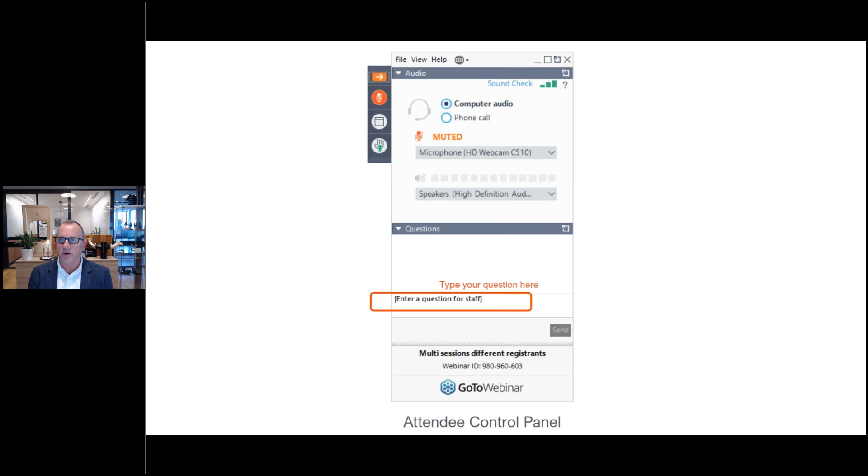Next slide, please. So just a minute on Stratasys. Stratasys is one of the pioneers in the additive manufacturing industry. We have more than 140,000 installations around the globe, and more than 30 awards in the AM industry. Today, we are the world's most widely used 3D print brand, especially in manufacturing and for tool making. Next slide, please.

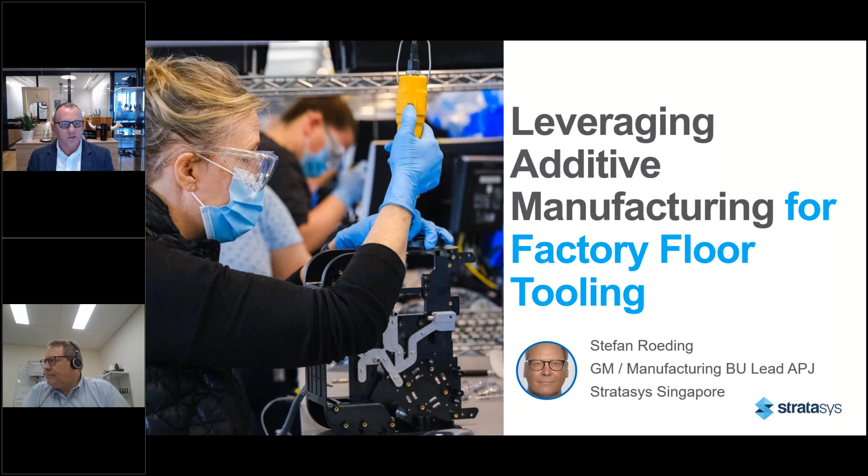Before I turn over to Stefan, if you could turn on your camera - let me share some highlights of Stefan's background. Stefan has been in additive manufacturing for many years, well over 20 years. He's also an award-winning additive manufacturing professional, and he won a best practice award from Ford for quality inspection fixtures. He now serves as the regional general manager for our manufacturing business unit here in our region, plus he's the general manager for Additive Flight Solutions, a joint venture between Stratasys and Singapore Airlines, where on a daily basis Stefan and his team produce end-use parts and lots of tools for manufacturing floors around the globe.

So, Stefan, welcome to our webinar, and thank you for agreeing to come in and speak to us today around factory floor tooling. Great, thanks, Ben. I think I have nothing to add to this introduction. Thanks a lot, let's go straight into the topic. As Ben mentioned, please raise a question, and if it fits, we will try to put it inside the slide.

So let's go straight to manufacturing trends. I think we see today a few very important elements worth mentioning here. Number one is, of course, we are moving forwards to Industry 4.0. We try to go from a physical to a more digital inventory trend. Even though in a lot of SMEs this is not happening so quickly, we see growth in the request towards this technology - large multinational companies are moving more towards digital inventory rather than spending a lot of money keeping parts on stock.

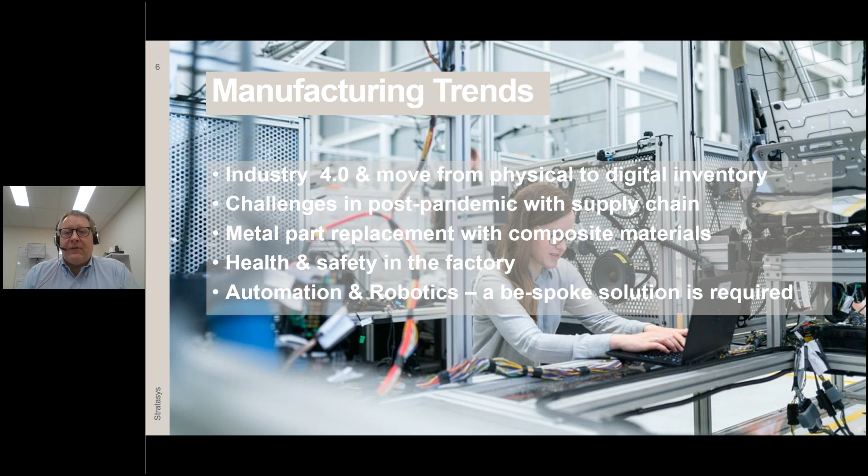And of course, automation and robotics. Here in particular, we see a huge potential, and I think we show a couple of examples. Weight reduction on end of arm tooling means half the weight, means increased speed. Increased speed means faster cycle times. Faster cycle times is bringing more profit to the companies.

Okay, let's talk 5 minutes about Stratasys. Stratasys is today the company which can offer the widest portfolio of 3D printing technologies. You have maybe seen the recent announcement, we took over 2 additional companies. By today, we can offer PolyJet, which is famous—I think everyone knows them in regards to full color printing.

Recently, there were some tests with the Fraunhofer Institute in Europe, really printing eyeballs so realistic that you can't see the difference anymore. We recently added RPS, a company which produces stereolithography printers. We are focusing with these printers clearly on investment casting and large prototypes with very fine details and high accuracy.

The FDM portfolio is pretty well known. I think Stratasys developed this technology 30 years ago, and today we talk mainly about manufacturing-floor type production machines, not the small engineering machines.

We added lately Origin, which is a DLP technology, very interesting especially when it comes to large scale manufacturing and very fine detailing. DLP technology will also be introduced to aviation. There are materials which fulfill all the requirements of FST, as well as have already been approved by major aviation OEMs.

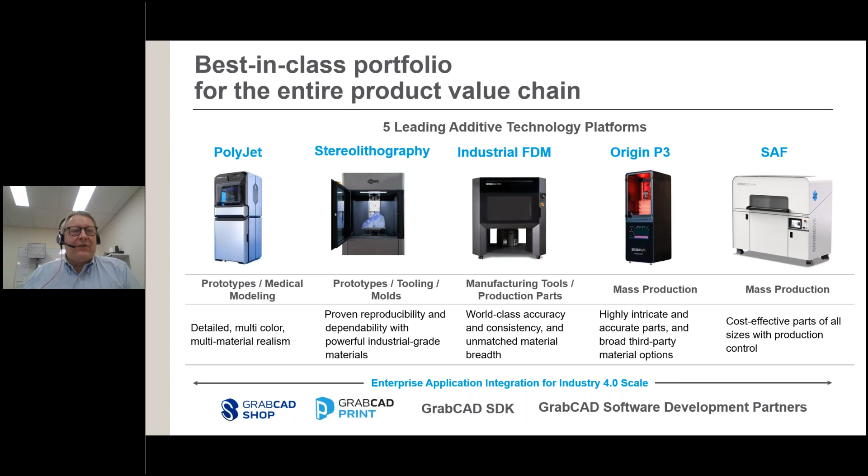Good, let us quickly look at the application technologies. As I mentioned before, we classify jetting, or PolyJet, more on the design phase. It's fast, it's very accurate, and of course very colorful, but this is really more for high definition prototyping. When we move over to the engineering side, we go into FFF filament printers.

Here we find mainly our MakerBots, our entry engineering technology printers. Moving over to manufacturing, of course here the Stratasys are especially the F450, the F900, but also the new F770, which can print up to 1 meter in length, a large volume. These printers make, especially for printing large components, very, very interesting options.

And then the DLP and SAF technologies are clearly aiming for serial production. We are quite happy that we already have customers who are producing, or intend to produce, more than 20,000 parts a year. And for these cases, the SAF technology is the right machine.

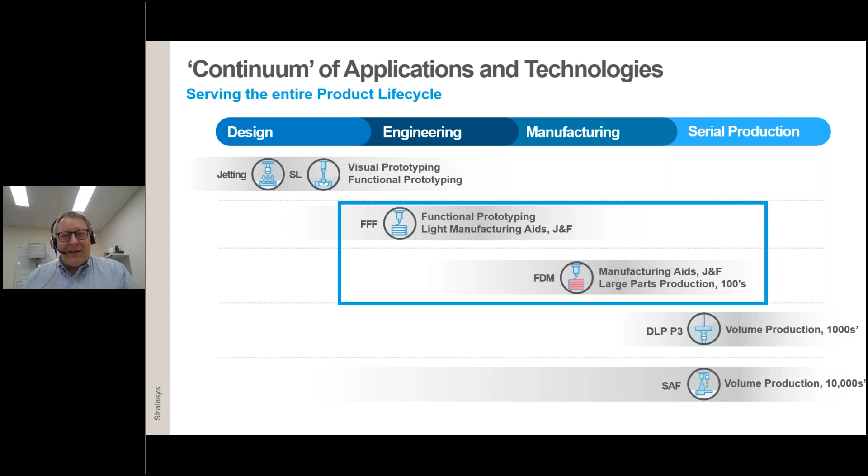All right, let's discuss today mainly about shop floor, and here I would like to concentrate on FDM technology. If you have questions regarding DLP or SAF, the new H350, I believe Ben is more than happy to send over some more information. Why FDM?

It's very straightforward, it's about a few very important points: impact strength and heat resistance. For example, for the nylon 12 carbon fiber, which we are using on the 450 and 900s, this is fantastic if you compare it to, for example, SLA, which is far too brittle. We have with the nylon 12 carbon fiber the best mechanical properties, which is more than 25% stronger and 100% greater stiffness compared, for example, to SLS.

It's easy to use. Whenever you see a company producing a powder bed machine, you have special environments, you have powder spill all over the place. This requires much more attention to the setting. An FDM machine you can put into the corner, plug in the power and internet connection, and then off you go.

Return of investment - this is typically for our printers between 9 to 18 months based on the machine type. For example, we have here in Singapore also an F900. Investment, of course, is huge, we have to print a lot of parts, so here we are aiming for around about below 24 months return of investment.

Our printers are also producing certified parts - that's what we are doing here in Singapore, with certified material. For example, Ultem 9085, but also Antero 840 CN are approved certified materials for different business segments like aviation, but also rail, public transportation, and of course we have with Ultem 1010 also medical approved material. But what's much more important is you have one printer which can cover multiple applications.

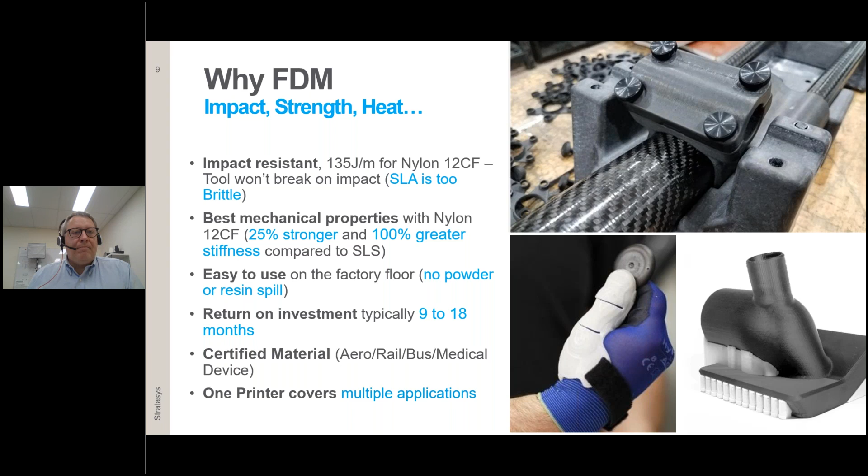A quick one on the nylon carbon fiber again, because this is very often my choice of material when I come to shop floor tooling. We have right now, or by today, the best in-class carbon fiber reinforced thermoplastic. We have a much higher density, over 99%. We have 35% chopped carbon fiber placement. We are achieving over 90% isotropy consistency. And we have with 135 joule per meter, actually a fantastic impact resistance.

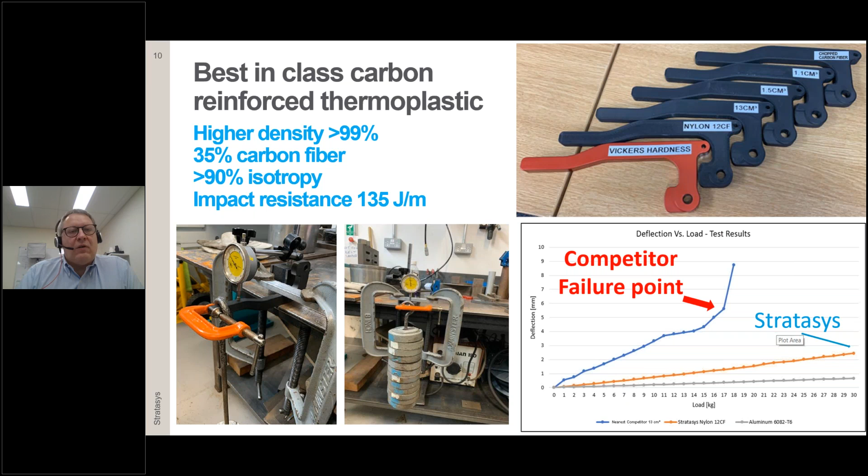The orange line is the Stratasys nylon 12 carbon fiber, and then the gray one is the aluminum 6082 Temper 6, which is a pretty typical tooling aluminum material actually, and the nylon 12 carbon fiber is coming much closer to this application. It is for a logistic company, it's a hook which has to take impacts as well as, of course, pull a lot of weight.

I just want to introduce you quickly to one of the machines, FDM, which is our new F770, which is a shop floor printer. It's mainly focusing on two materials at the moment, ASA as well as ABS. And it is a very price-sensitive printer, very economical, large print format, up to 1 meter by 600 by 600. And a very important message: you can make small parts on a big printer, but you cannot make big parts on a small one.

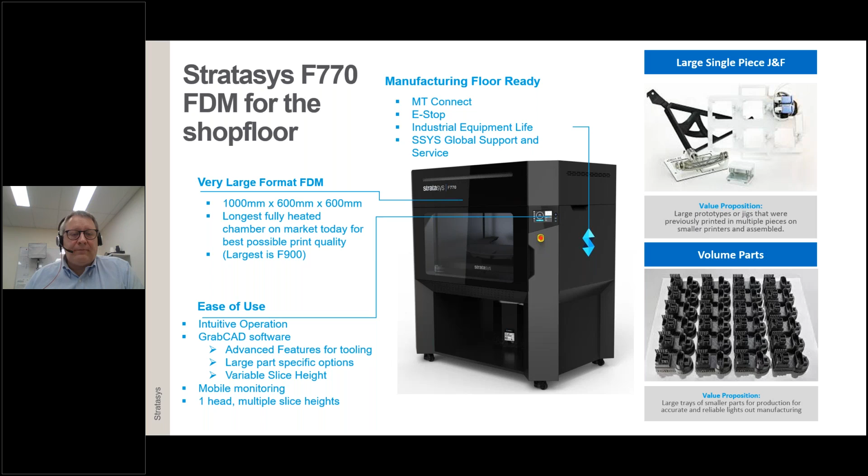So bear this in mind when you think about investing in a smaller printer. The price difference to this large 1 meter printer is not as big as you might think. Bennett, I think, is more than happy to give additional pricing information on that.

Let's go back straight to challenges for the factory floor. I'm concentrating on a few topics: prototyping, spare parts, metal replacement. So the typical challenges today are high cost.

Obviously, a metal produced part. We have done several comparisons, and we see very often that if you machine a prototype out of an epoxy block material or out of aluminum, for example, we achieve sometimes up to 98% cost reduction by just printing the part you need. We have a nice example I'll show you later on.

This can be printed during the coffee break. It's 30 minutes and then the part is available. Try this on a milling machine. Another point is lead time, of course. You print when you require the parts.

We see today also a lot of 3D printers without heated chambers. You have a less consistent bonding between the different layers, and this is, of course, leading to failures in products. So unreliable printers is today also a threat or a challenge.

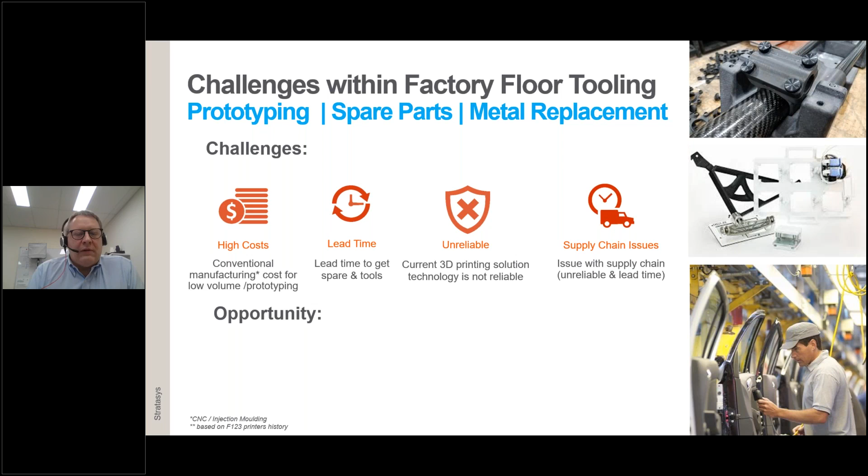And as I mentioned before, supply chain to me is always an extra point, especially since the last 2 years. I don't know how you see it actually, but to me this has been a nightmare at several locations when you're really looking for or waiting for part deliveries from different locations. 3D printing makes it possible to print on demand, and we are changing also here in Singapore more towards local manufacturing. So opportunities with our technologies is great.

Lower cost, we promise, and I think this is really a promise. We can reduce cost on a lot of applications between 60 to 95%. I have enough examples, I will show some later on.

Fast turnaround. Typically, lead time reduction from 50 to 90% is possible because you print on demand, you print on the spot, you print at your site. So you print when you need. Shipping cost saving, obviously, I don't have to mention this. Print in-house, it's available on the spot.

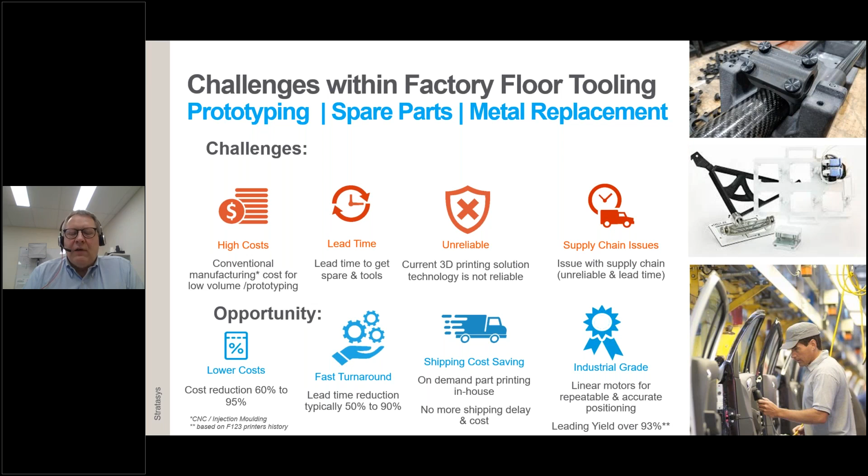And of course, I think one of the very important points, and we see this every year in our customer satisfaction reports, the reliability of our technology with dedicated service engineers at your hand is a very important step towards reliable manufacturing. As you can imagine, we produce aviation parts. I cannot allow a machine breakdown for 1 or 2 days just because a fan is not working. So we need, first of all, the service, but foremost, I need reliable printers.

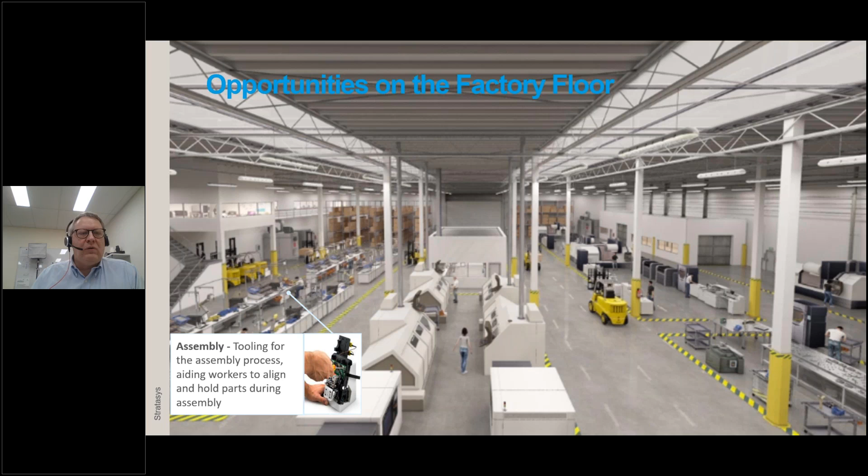Okay, opportunities on the factory floor. Typical factory floor, and we do this really very, very frequently with aviation customers as well as other industry customers. When we are going on a factory walk, we find on average 30 applications where we would like to prove to the customer that, look, print the tool and we promise you we have a cheaper product, less cost, and a more reliable tool.

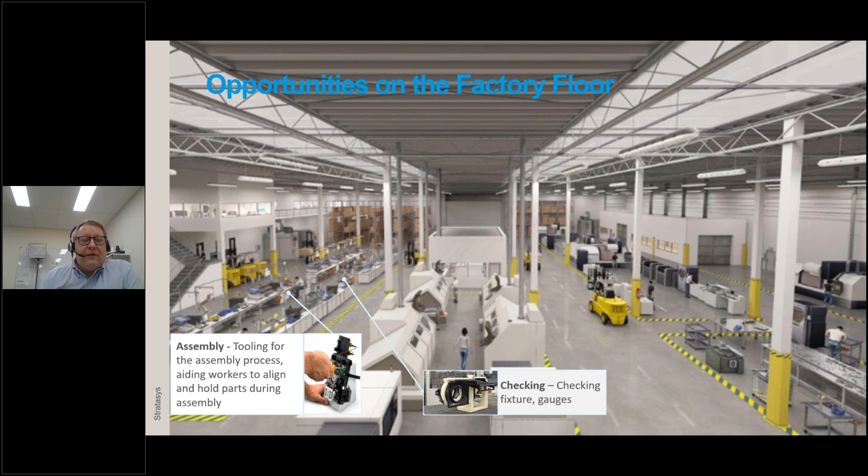Some are, of course, in assembly. We have parts in checking plug gauges. It's a very big topic and something where I spend a lot of time of my business life inside. R&D, tooling, development phases of a product.

Obviously, this is one of the major prototyping steps. That's why 3D printing became so big. Obviously, we all agree that 3D printing replaced most of the conventional manufacturing methods in creating prototypes. We have quality control, jigs and fixtures, also one topic I really like.

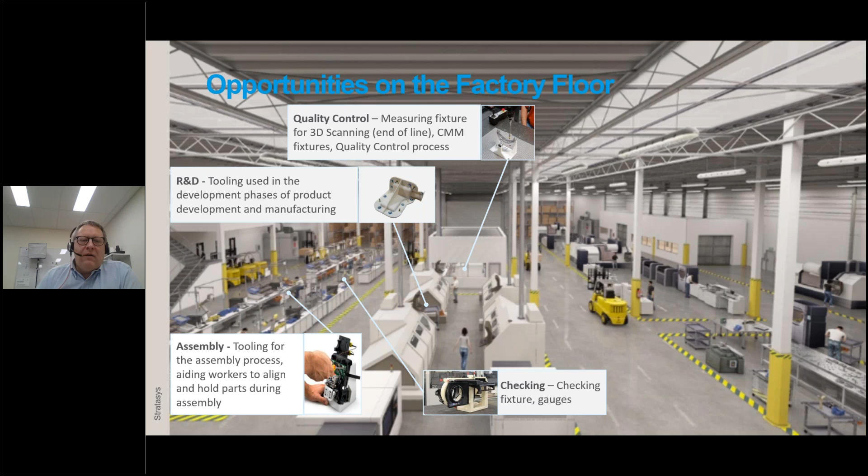A measuring fixture is a one-time use application. It is produced only once, so 3D printing is the choice of manufacturing technology for measuring fixtures. Packaging logistic, fantastic application. What else do we have?

Health and safety. Oh yeah, we have a very nice example. I'm not sure if you can see the picture. This is the employee wearing a supported thumb on his right hand, which is avoiding health issues and, of course, injuries to the employee. It increases greatly safety and addresses ergonomic issues.

And of course, last, automation, end-of-arm tooling, definitely a very interesting topic. As I mentioned before, less weight means faster cycle time. Faster cycle time means more profit.

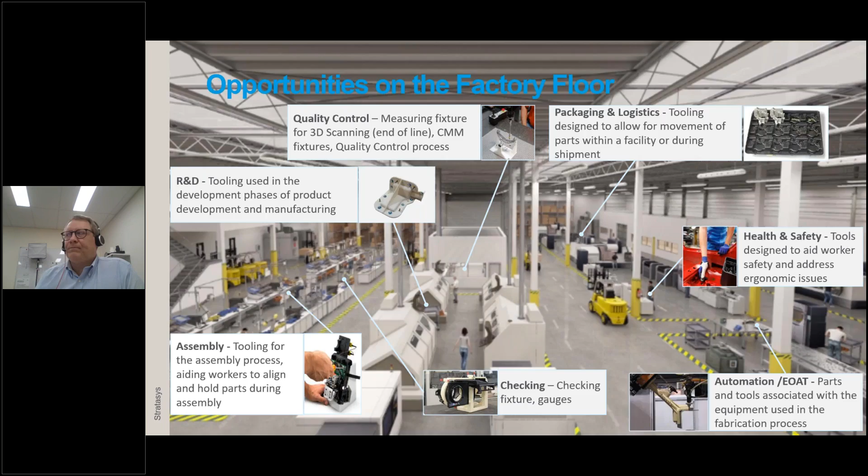The field is so big, I'm concentrating really today on 4 main topics. I'm talking about tooling and end-of-arm tooling. I'm talking about spare parts production, end-use parts. I'm talking about measuring fixtures on assembly jigs. And of course, I show some examples from the CNC sector.

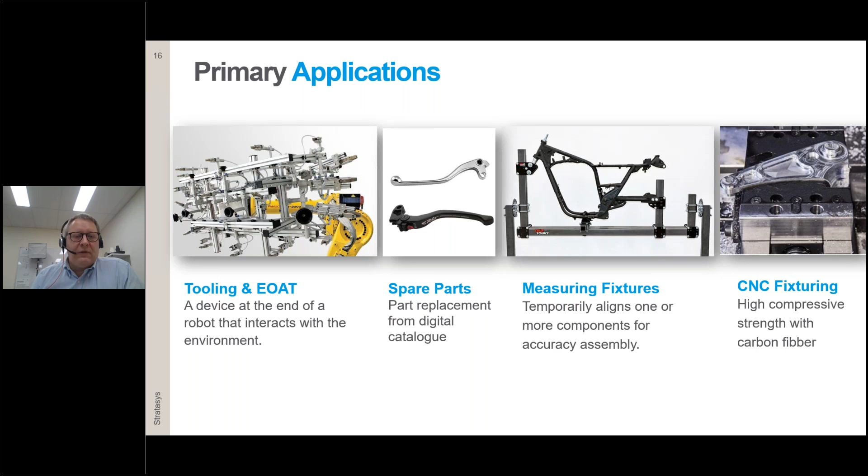Because we produce more and more 5-axis produced components on our CNC milling machine, clamping is a very important and difficult issue here. So let's go to tooling and end-of-arm.

This is a nice example from aviation. It is an aileron hinge bearing tooling. You see the hinge bearing tooling, which normally has a metal bearing inside. And the customer required a tool to remove this bearing from the aluminum part without damaging the aluminum part.

And yeah, 3D printing was able to print a very simple tool, put it around the aluminum aileron part, and hammer out with an additional nylon carbon fiber 12 tool the bearing from the part and replace it with a new one. Fantastic example. It is very lightweighted. It addresses all the important ergonomics. And if I remember correctly, the tool was around 1,200 Australian dollars, and it was delivered within 48 hours. Very straightforward.

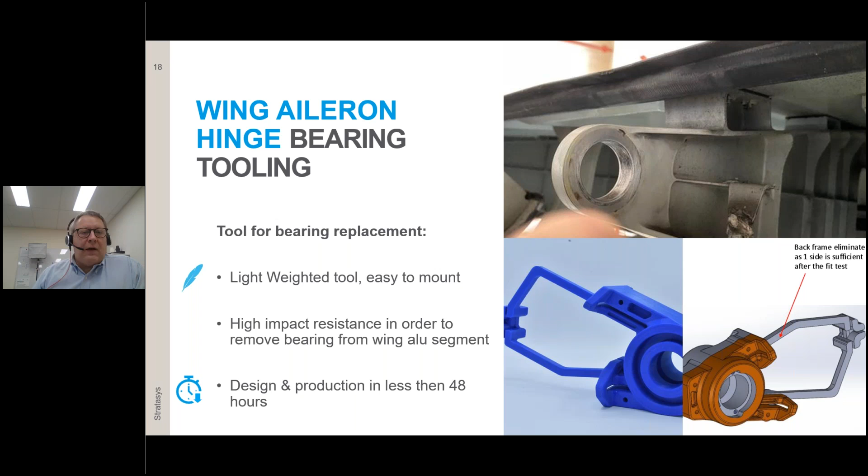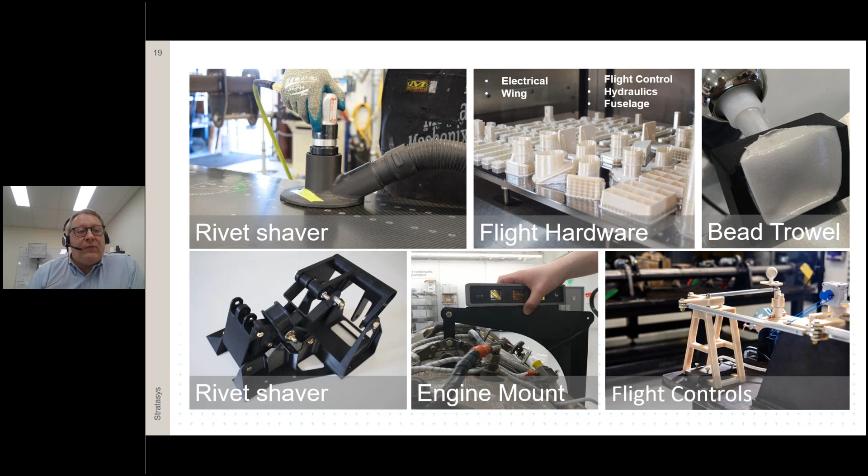Another parts for aviation are, for example, rivet shavers. All these tools have been designed and developed by Boom Supersonic, the nice company trying to get supersonic back into the air. We have engine mountings, flight control parts. So you see not only tools, but also end-use parts. Especially the engine mount and the rivet shaver are production tools permanently in use.

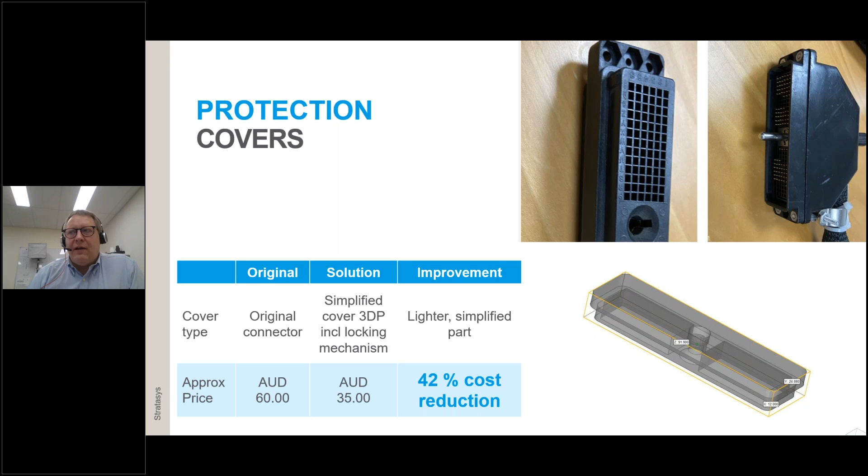Protection covers, a good example. This is one of many parts we find during our shop floor. It's about offering protection covers to special avionic cables and plugs. The original plug is priced at 60 Australian dollars, and a simple replacement tool including locking mechanism costs $35. So you have a 42% cost reduction. To me, this is a no-brainer. It's proof that with design changes and an optimized component approach, we can beat conventional tooling at cost.

Another very important application, of course, are grippers, especially grippers in an environment which requires ABS ESD7 material - electrostatic dissipative materials. We have some more examples from Ricoh later on. It's a fantastic application because grippers can be produced much lighter. You have optimized vacuum or air channels. Very often you combine multi-parts into one single component, which reduces storage, design, and maintenance cost. And of course, printed overnight, so availability is fast. Especially these multi-grippers, weight plays a crucial role. You need to reduce weight in order to run faster cycle times.

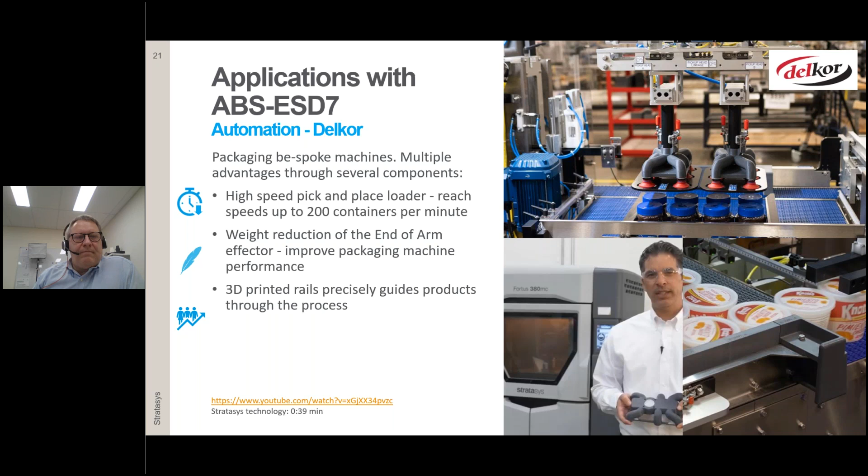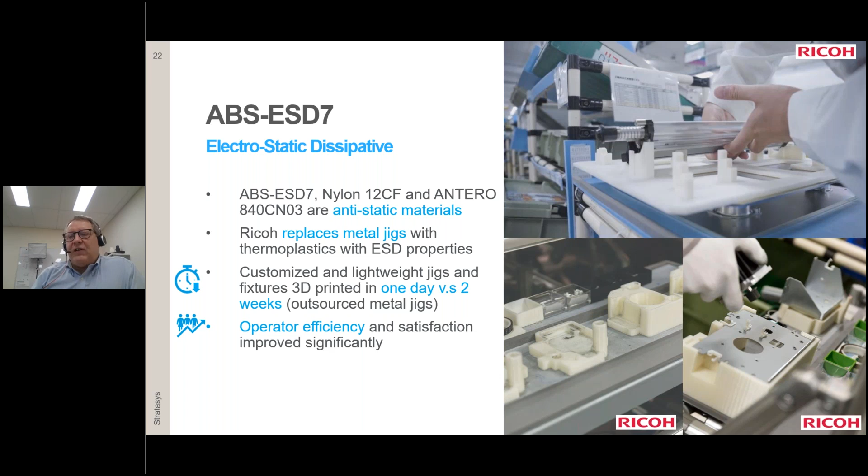Another one, this is from Ricoh as I mentioned before. The anti-static materials play a very important role here, and we completely replaced most of the metal jigs with our thermoplastics. It's lightweighted and printed in a day compared to 2 weeks for the outsourced metal jigs. It's more operator efficient, because we can integrate additional features much more easily for aligning and placing the component into the jig and fixture. The same thing applies to additional grippers - these are not small parts. Here's a good example of our ABS carbon fiber 10, a new material available for the MakerBot as well as the F123 series, which brings it to the 170, 270, and 370. Fantastic material. Nylon carbon fiber is still limited only to the 450s and the 900s.

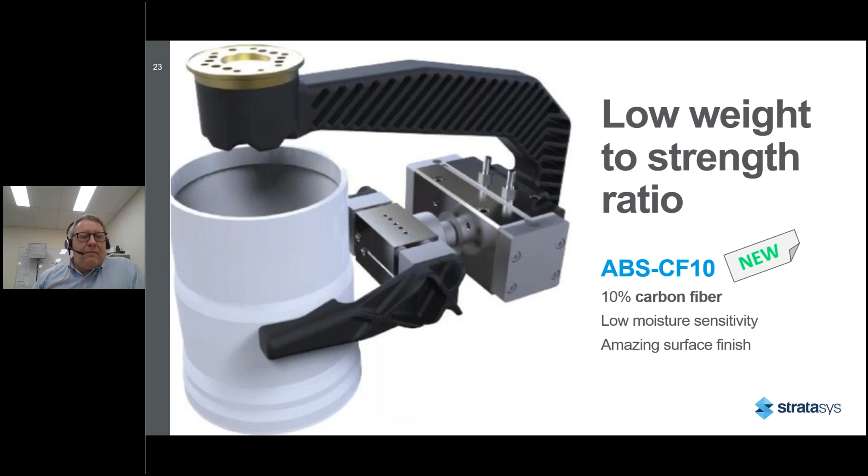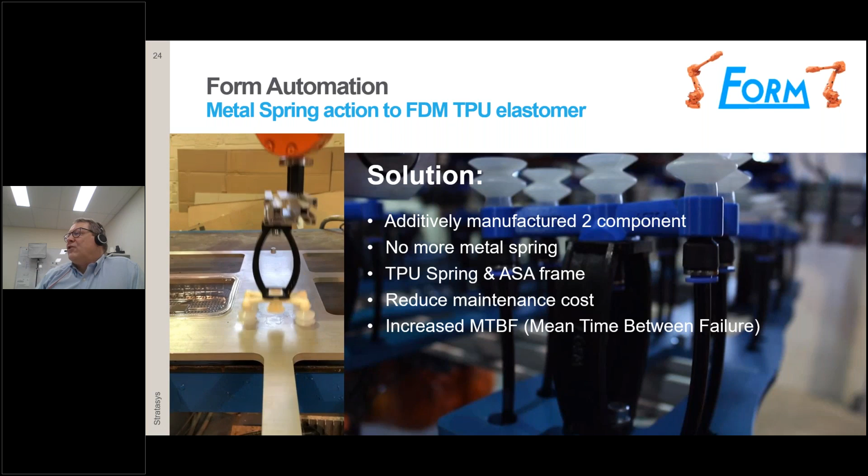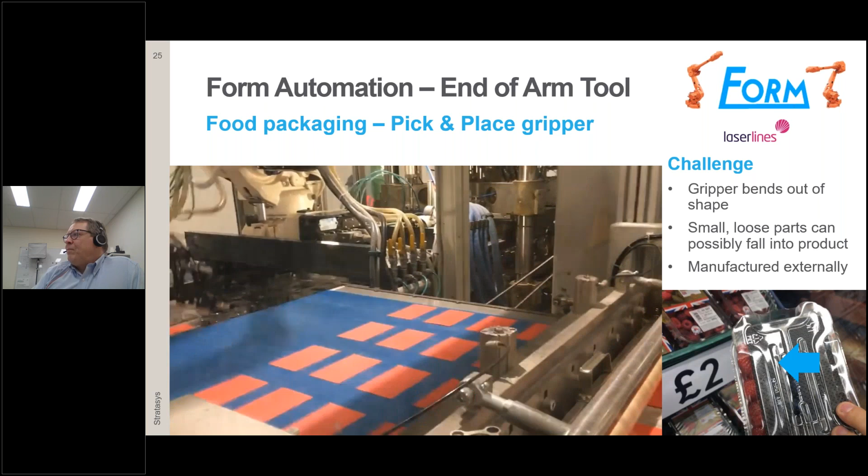Another gripper also used in food packaging, a pick and place gripper. You see here the number of parts - 20 parts are grabbed at the same time. Obviously, you can probably reduce this gripper even further by also changing the framework of the gripper towards 3D printing. For that exactly, you need a large format printer like the F770 or the F900.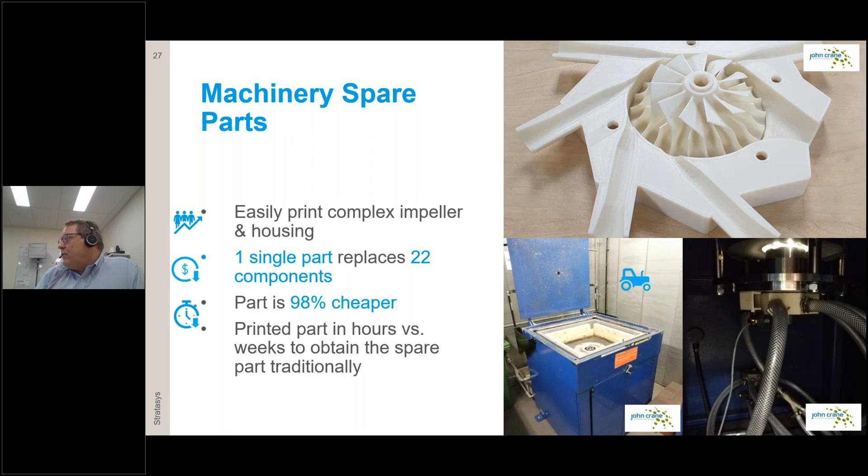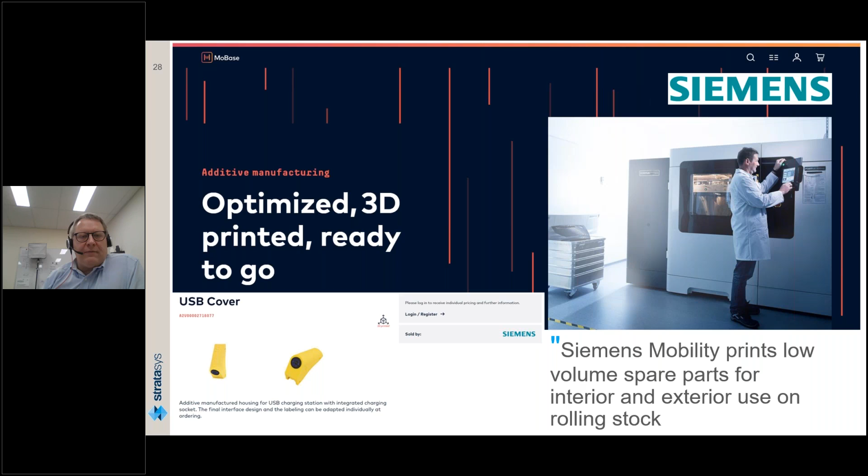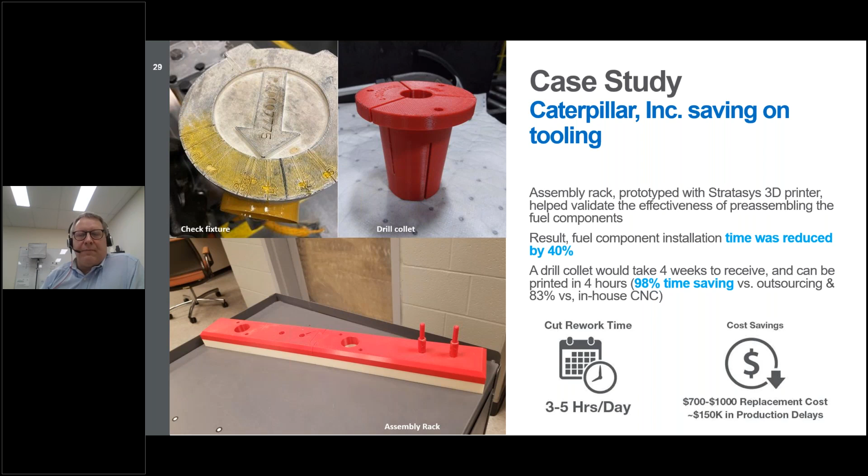What is this? A drill. Oh, so the drill collet was a different part again. It was due to the supply chain, received only in 4 weeks. It can be printed in 4 hours, especially on the F900s, where the print speed is tremendously bigger compared to other printers.

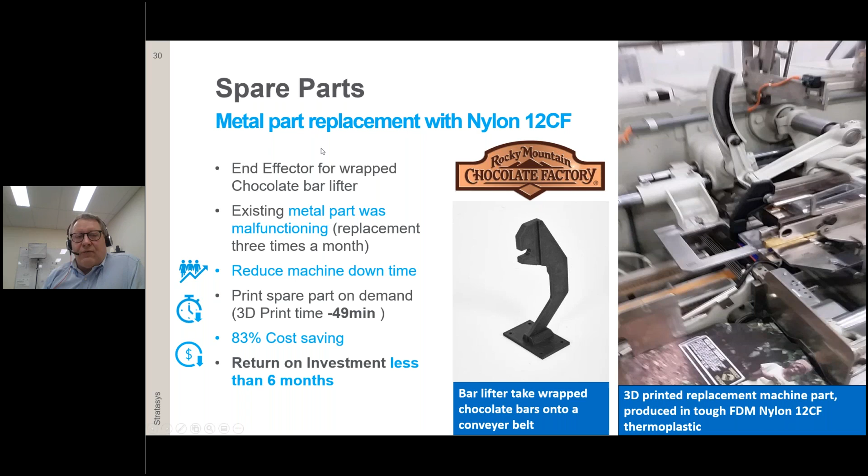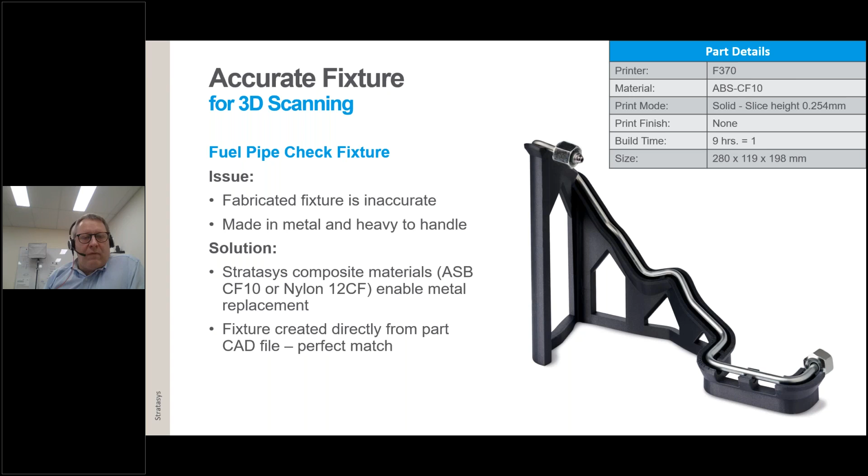Measuring fixtures, that's a good example. Additive manufacturing can bring inspection jigs up to speed. A good example is an accurate scanning fixture, for a fuel pipe check fixture. You just place a part inside. You can print and fine adjust these items to an accuracy of plus minus 0.2 millimeters. If you need further accuracy, there are ways to do it, but this is the standard mechanical engineering way - using shims and adjustment blocks if you need better adjustment.

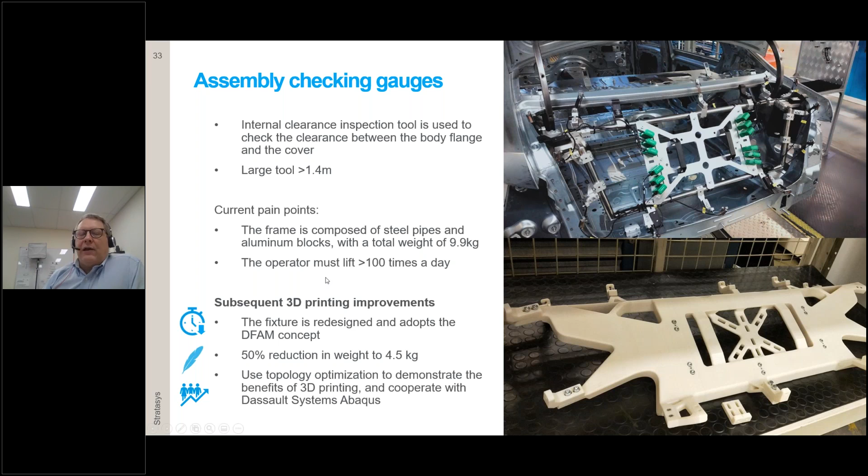I have been selling these kinds of checking fixtures for many years. In the automotive industry, surface contacts have an accuracy of plus minus 0.1, and master location points require plus minus 0.05 millimeter. This can only be achieved if you can fine adjust those location points. This cannot be printed still today.

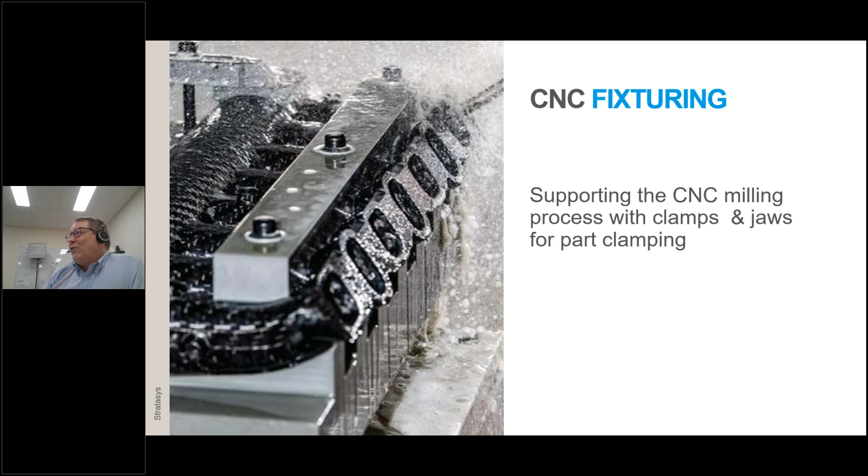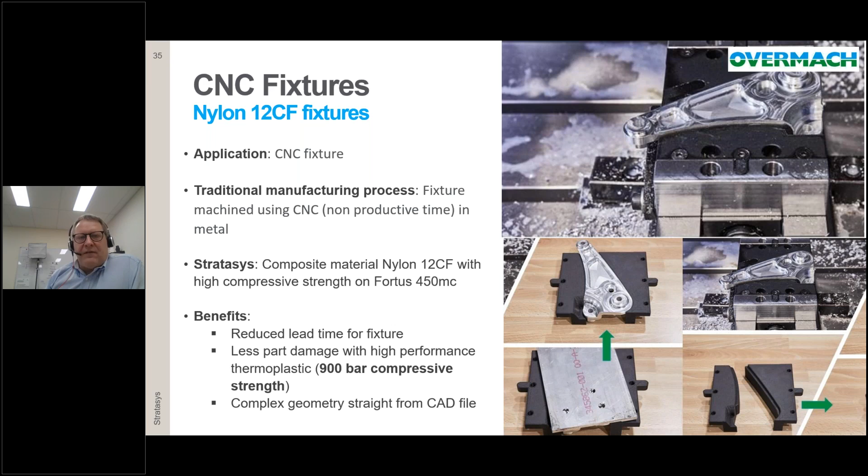We have today great applications from different customers printing 3D shaped components in order to replace the standard jaws with 3D printed jaws. The nylon carbon fiber can withstand huge hydraulic vice clamping forces, so you can really clamp and secure the part on your milling machine, even for heavy milling applications. And an important message - you print the jig away from your expensive CNC milling machine. I think this is one of the most important assets.

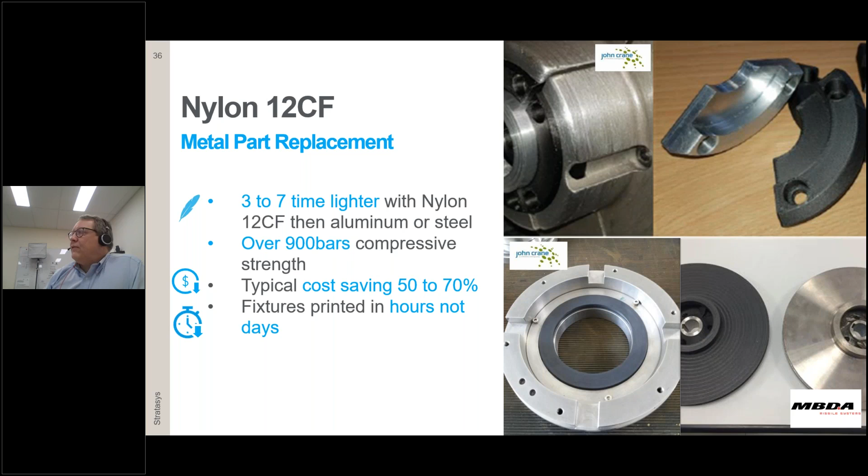Another one here, metal part replacement with nylon carbon fiber, holding small steel parts during grinding. We have additional samples, which I always like, when it comes to very complex casting components that need a fine finishing at the end. Holding this kind of component without deformation is always a challenge, and 3D printing can play a very fast role here.

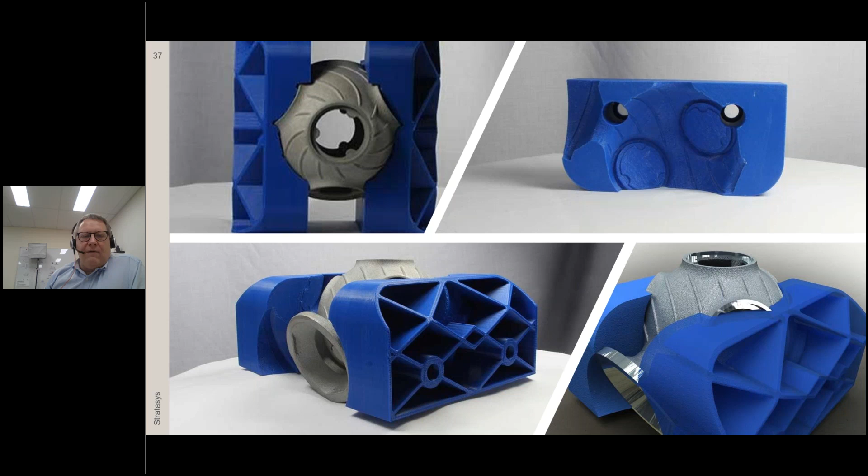This brings me to one of our nice customers, and I think his statement is so true: it's a small $6,000 printer which keeps a $1 million machine running through automation. It's the right tool to move fixturing away from the milling machine - instead of producing it on a very expensive milling machine, move it toward an entry FFF printer like the MakerBot.

I would like to show a small video about this one.

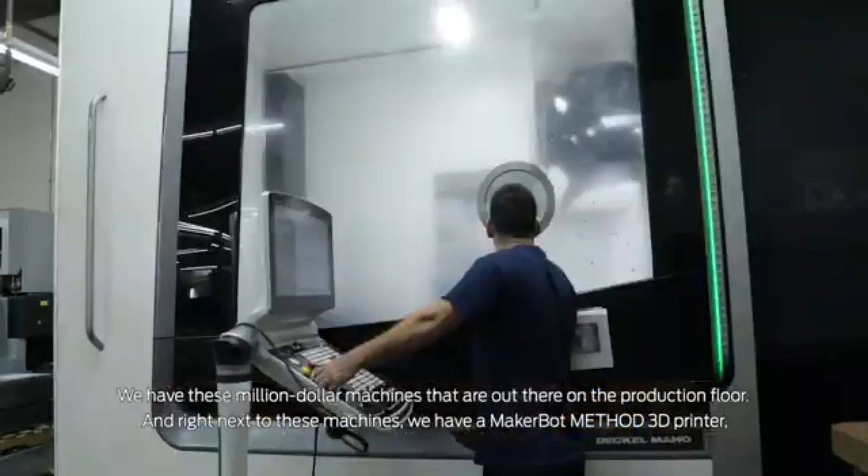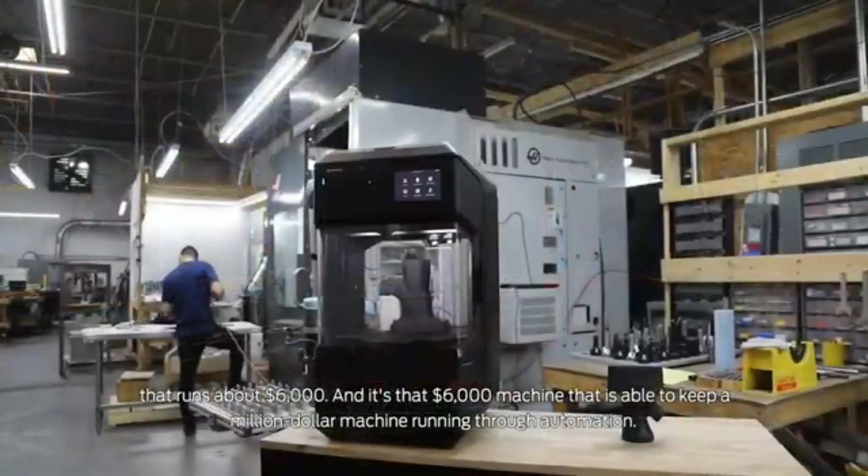We have these $1 million machines that are out there on the production floor, and right next to these machines we have a MakerBot Method 3D printer that is about $6,000, and it's that $6,000 machine that is able to keep a $1 million machine running through automation.

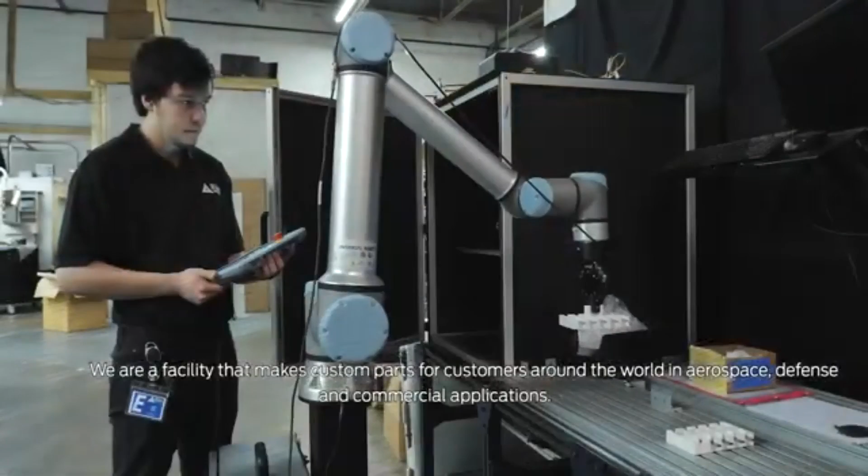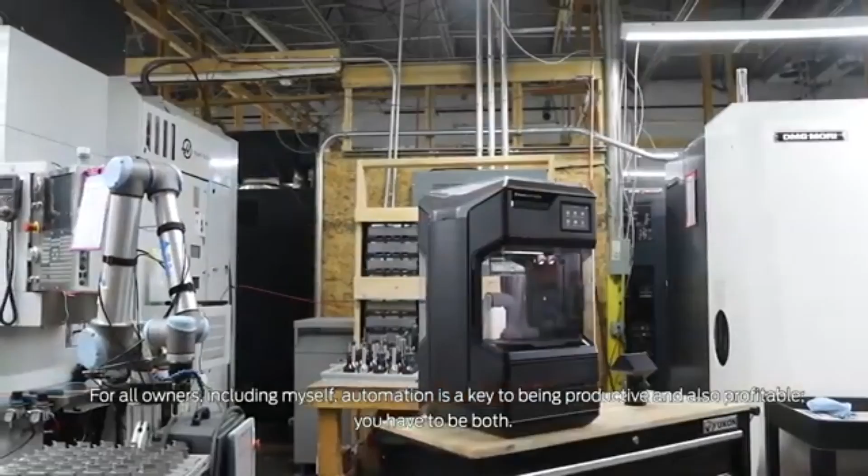My name is Gary Kuzman, and I am the owner of All Axis Machining and All Axis Robotics, located in Dallas, Texas. We are a facility that makes custom parts for customers around the world in aerospace, defense, and commercial applications. For all owners, including myself, automation is key to being productive and also profitable. You have to be both. With the implementation of the automation we have in our shop, I'm able to reduce our hourly costs significantly to be competitive with other companies that outsource their products overseas.

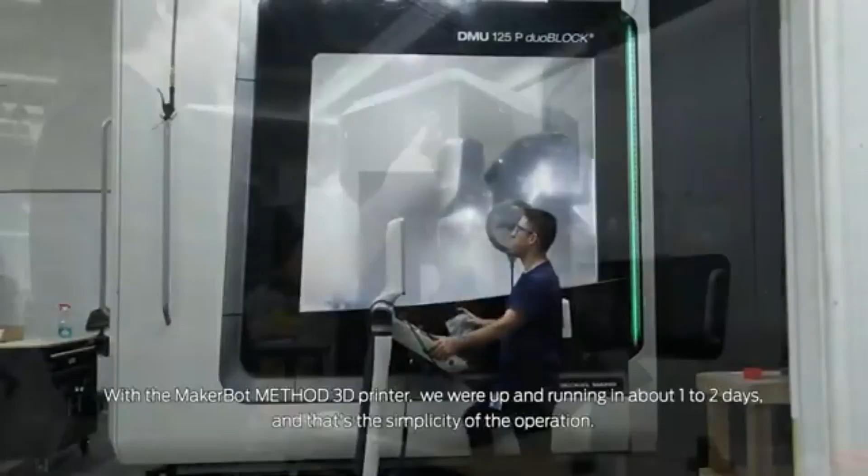With the MakerBot Method 3D printer, we were up and running in about 1 to 2 days, and that's the simplicity of the operation. My name is Dave Burkowski, and I'm the General Manager of All Axis Robotics.

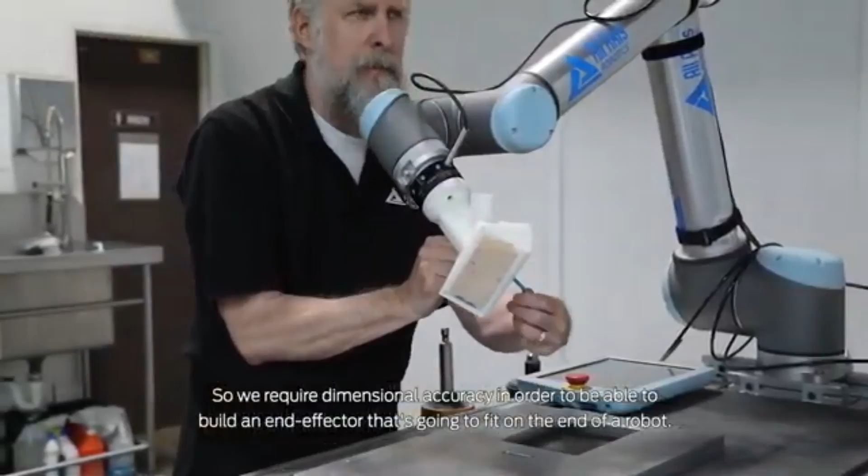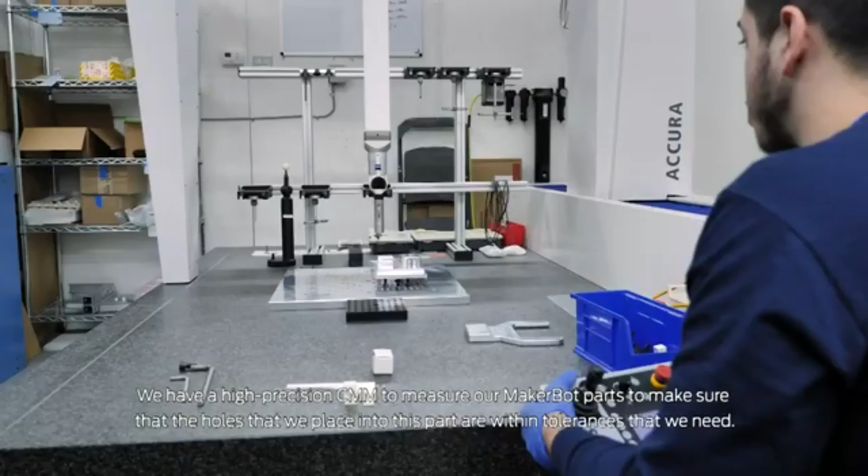We require dimensional accuracy in order to build an end effector that's going to fit on the end of the robot. We need precision within 0.004 of an inch, and we are incredibly satisfied with the MakerBot Method output from that location perspective. We have a high precision CMM to measure our MakerBot parts to make sure that the holes we place into this part are within the tolerances we need. And lo and behold, we are very happy.

My name is Cristian Almendariz. I am an engineering manager here at All Axis Machining. In a high-mix, low-volume shop like ours, having a MakerBot Method has enabled us to be able to meet the wide variations of parts that we have.

This is the end effector for the robot, a 3D printed sander. You have two surfaces for two different grits, and then an attachment for a vacuum hose. So this sits on the robot, and the robot will go through and sand and vacuum at the same time.

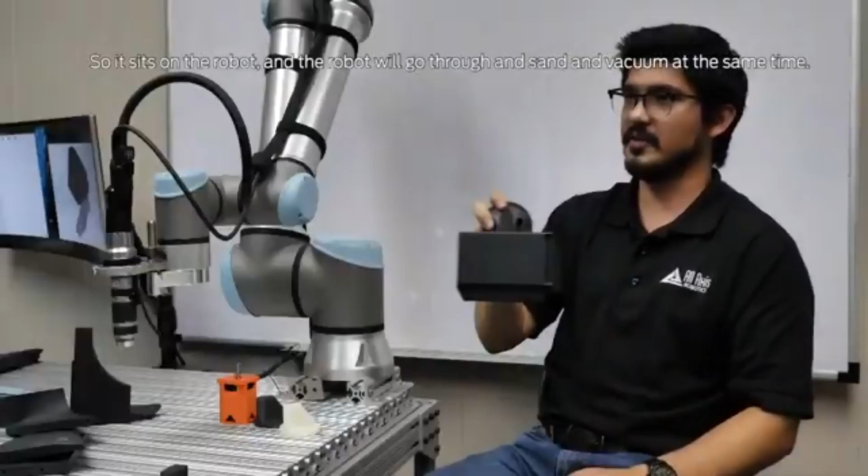If I wanted to machine this, taking into consideration the tool cost, the time to program, and the time to set up the machine and run it, I'm looking at $3,000 to $9,000. If I wanted to 3D print this with the MakerBot Method, it costs us maybe $5 to $10.

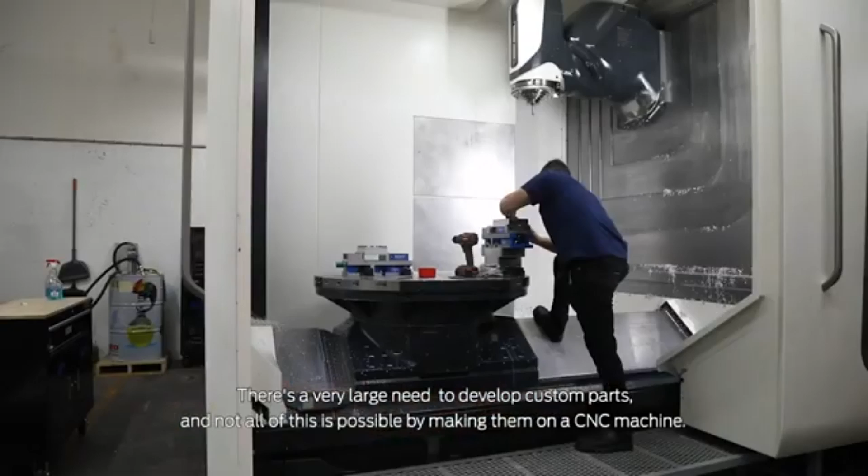There's a very large need to develop custom parts, and not all of this is possible by making them on a CNC machine. So when we purchased the MakerBot Method 3D printer, we automatically obtained all that capability for customizing all these different parts that we need.

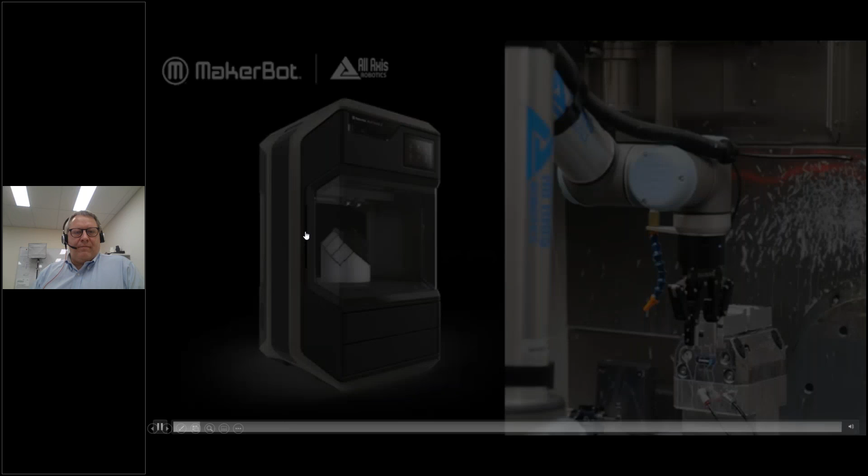Which brings me, oops, sorry. Brings me to the end of our presentation today. Ben? Yes, I'm here, Stefan. Thank you very much for your time.

We have had a few questions come in via the questions box, and I'd like to put them to both of you. The first question is, why would someone use nylon carbon fiber versus ABS carbon fiber?

Okay, the nylon carbon fiber, if you put the two data sheets next to each other, obviously the nylon carbon fiber is still stronger. But we are printing nylon carbon fiber only on the F450 and the F900s, because you need a higher heated chamber. The ABS carbon fiber is the entry material, which is strong enough for most applications. As you've seen in the MakerBot video, it can do a lot of jobs, but maybe not the final one. Let me show a nylon carbon fiber tool here.